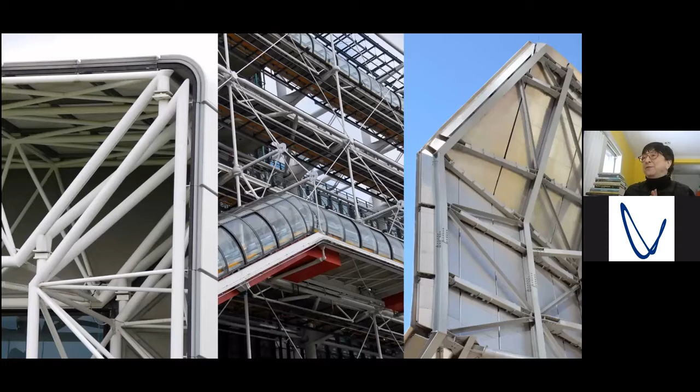And in fact, I spend most of my time these days, when I do attend conferences, attending engineering conferences and talking to engineers, because I find the field incredibly interesting. And I think the merging of engineering and architecture, as you can see in these sort of high profile projects that really started to shape my interest in architecture, the Sainsbury Centre, the Pompidou Centre, and Frank Gehry's Pritzker Pavilion, were very formative in my thinking about steel at a time in architectural design when nobody else seemed to be particularly interested in it.

High tech, not much. Deconstruction, yes.

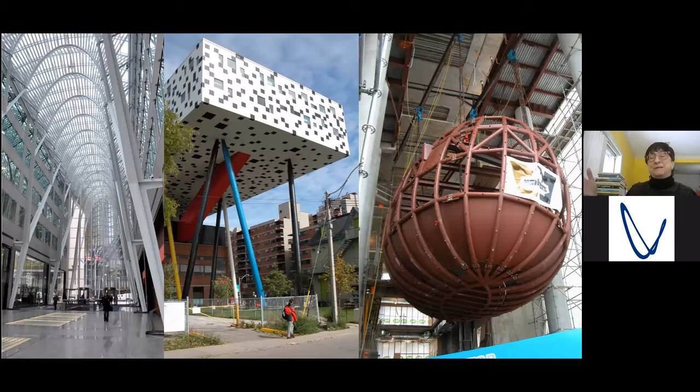Anecdotally, Frank Gehry, when I was a student, would come to the University of Waterloo because he's Canadian from Toronto, and we used to have Thursday night hockey at midnight. Frank actually played with the students back in the day. As I went through my teaching, I was somewhat distanced from real construction, just by the nature of the beast.

Then we ended up in Toronto with some really high profile projects. We had Calatrava's BCE Place, which you can see on the left, which I didn't have the chance of seeing under construction—it miraculously appeared because I don't live downtown. Then there's Will Alsop's OCAD building in the center, and Norman Foster's Leslie Dan School of Pharmacy on the right.

As you can see in the image on the right, I was on the construction site for that one. Being on the construction site and understanding the reality of putting things together gave me an entirely new perspective on architecture, construction, steel, and the way things work.

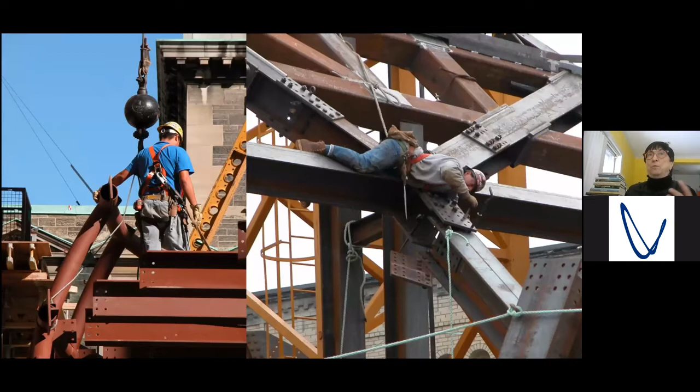So I took great joy in hanging out on construction sites, watching the ironworkers and understanding how they put things together and how they solve problems, because both the curved steel and the lifting of the pods, which we can see on the left on Leslie Dan, and the diagrid structure on the Royal Ontario Museum addition by Daniel Libeskind on the right, were really difficult and challenging projects.

I was so impressed by the quality of the ironworkers who—coming from an architecture background myself and understanding difficulties in construction—these gentlemen never lost their cool when putting things together, even if there were multiple tries at getting something to fit. That really, really resonated with me.

So the other aspect of the me part of things is me with my camera. What I began to bring to my research, this new life of research into how things get built, was photography—the details, trying to get up close, trying to go in with my zoom lens if I wasn't actually allowed access to the site, and trying to see how things went together.

That was something I could bring both to my required research as a professor—it is true, you publish or perish—as well as trying to bring interest for my students with anecdotes and images and information that they were not going to find in their textbook.

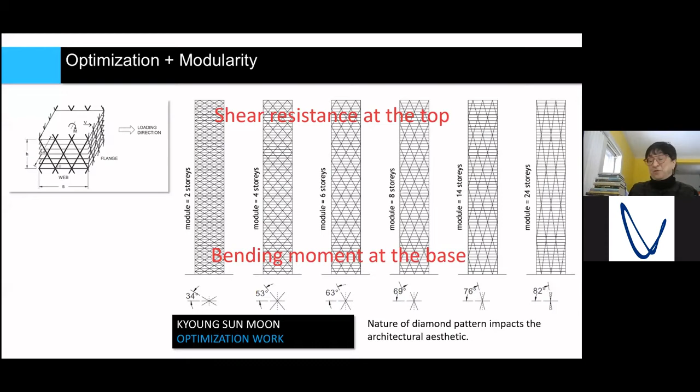There didn't seem to be anything larger—there was not a book on the topic. So I decided to make that the topic of my research. I went online and investigated everything that the Council on Tall Buildings and Urban Habitat had to offer on structural systems, and I came up with this suite of projects, looked at them, and said, well, this was quite attainable.

I could look at every single one of these buildings because this was it in terms of constructed or visionary diagrid structures. The ones I couldn't visit were the Shukhov Towers, and lucky for me, my colleague Elizabeth English had done her PhD thesis on that, so I had lots of information there. The Lotte Super Tower proposed by SOM wasn't built, but I had good contact with Bill Baker for information. I also had people at Farrell Partnership who could give me information on the first version of the Zhongguo Zun Tower. Tornado Tower and Doha Tower I was not able to visit because I had no access to Qatar.

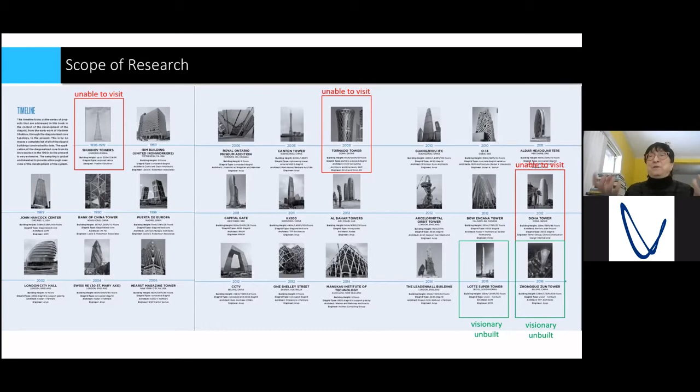So I started to examine these buildings, take them apart, look at their details, and try to come up with a methodology. From the Shukhov Tower, which was a hollow support system for water towers with no floors, to Swiss Re, which would be the first contemporary diagrid tower, where Foster actually referenced back to the Shukhov towers as a precedent, which one can see pretty clearly in the example.

When I was actually doing work over in the UK, which was sadly my last visit there in 2013, which makes me sad—I so enjoy visiting the UK—the Cheese Grater was under construction. I also had a colleague I'd met through conferences who was working at Arup.

The other thing I noticed looking at all the buildings was that two-thirds of them had Arup on the team. So I thought, if I'm trying to do in-depth research, I need to contact Arup. They were nice enough to allow me to sit in their offices for one week in February during my reading week, and go through all their files, papers, and photographs to help me with my work.

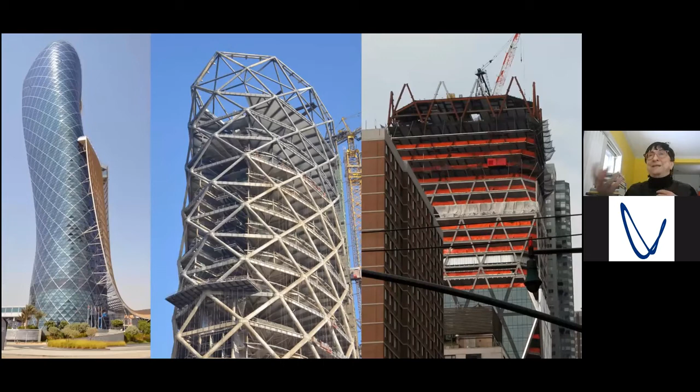Adding to that, we've got the Capital Gate Tower on the left, which was the furthest backward leaning one. There was one I ended up getting a site tour for actually after the book was published, the polydiagrid, the Diamond Lantern in Beijing, which I got a site tour of. And I happened to be in New York on other business when the Hearst Tower was going up.

So the idea to me is that you really have to experience things in person. There's only so much you can get from reading the information of others. There is just nothing that replaces a good old-fashioned site visit.

When I went through all the information, I came up with a methodology so that we looked at modules and modularity, node and member design. The cores on every single one of these buildings were different. What was revealed to me from the structural engineering perspective was that a true diagrid doesn't need a core—that all of the gravity and lateral loads should be able to be handled by that perimeter diagrid, which has no vertical columns. So I started to look at varying examples of cores: facade, glazing, expression, interior and exterior diagrids, and then technology, wind, and seismic issues.

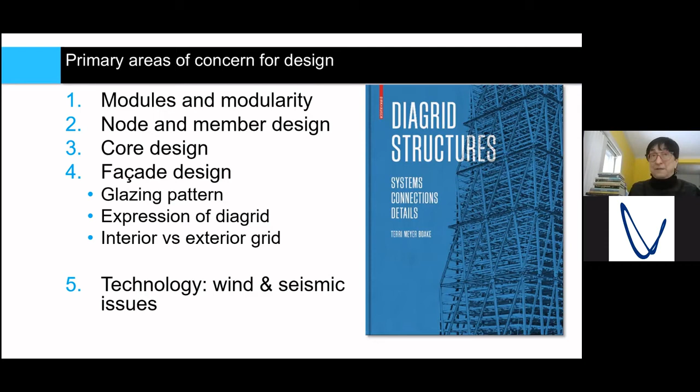So that was the essence of the text. But a lot of it drilled down to this first push by Kyoung Sun Moon in terms of optimization.

When I was looking at the Lotte Super Tower proposed by SOM, they had gone through a huge amount of research in terms of actual optimization of super tall towers. This was to be 555 meters tall, and they used parametric design to take it from very steep columns at the base, which were more useful in resisting moment and taking the gravity loads down, to quite sloped columns at the top with a round pattern.

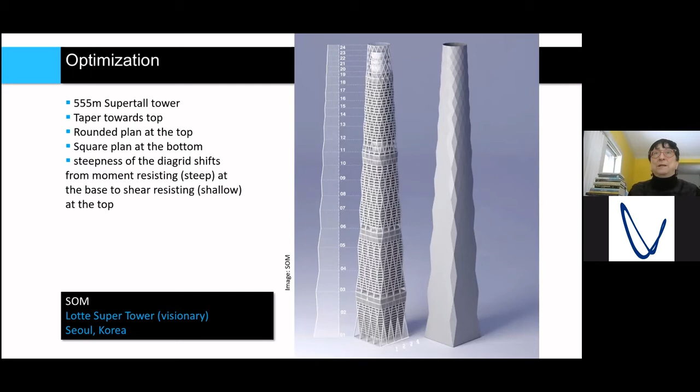The faceting on the building was also used in the wind design to fool the wind, to trick the wind, and to deal with vortex shedding. This is a little bit of the charts they gave me on their optimization study in terms of the forces and to come up with the angles.

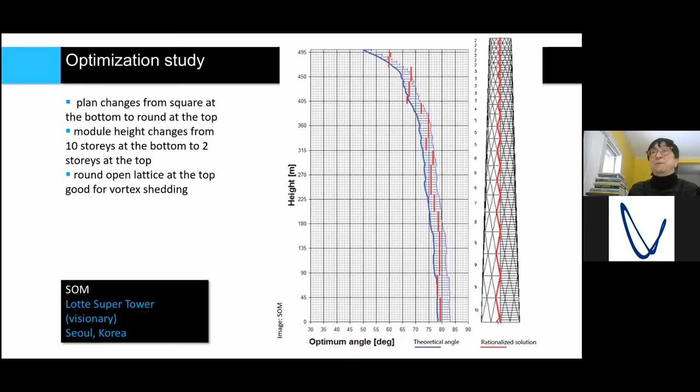But in the end, it looked to me that for the most part, it wasn't engineering at all that was pushing these projects—it was architectural design, and the slopes on very few of them had anything to do with optimization. They had to do with the shape of the building and the look of the building. From that research, I started to focus more on the node itself, because to me, and again with spatial structures, this is the big aha moment with diagrids.

We do not see many diagrid buildings still being constructed, because in spite of the fact that they can theoretically save on the weight of the steel, which should save some cost, the engineering and the construction and the fabrication is more than an orthogonally framed building.

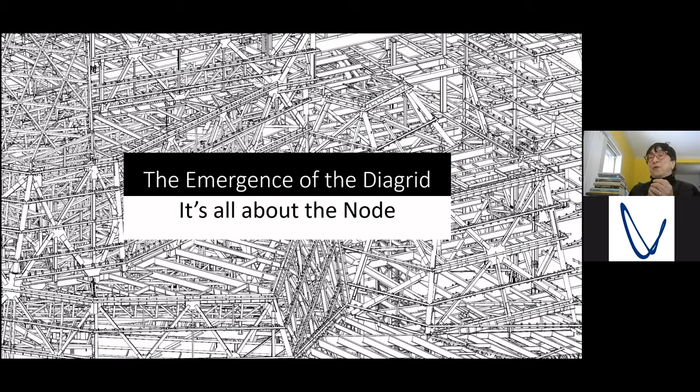But this idea of nodes as being a way to receive and transfer loads from various angles was a good takeaway for other more complex projects. If we look at the basic definition of a node - a point at which lines or pathways intersect or branch, a central or connecting point - this to me is the connection between lightweight systems and diagrid systems and heavier construction that is now looking at nodes as being really efficient ways to transfer forces.

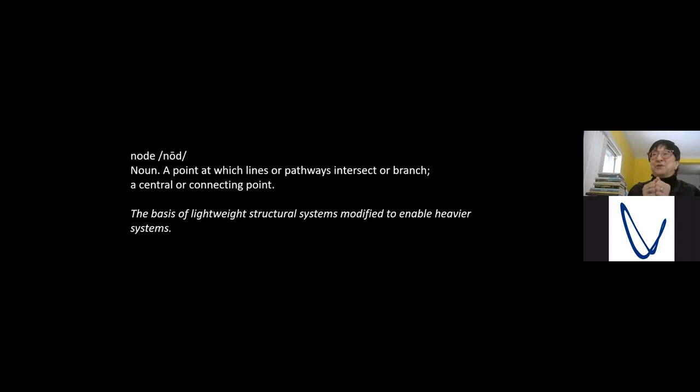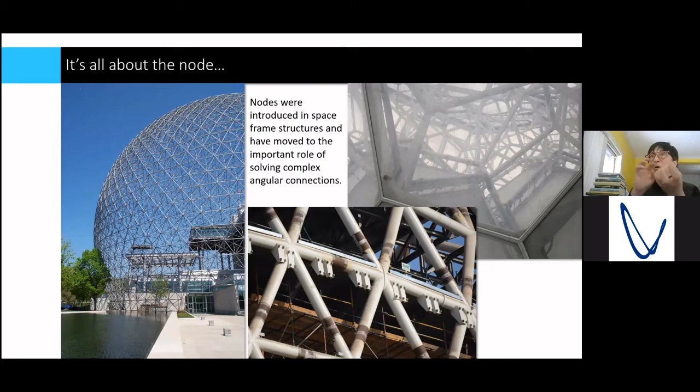If we look at node construction, we've got the Expo 67 in Montreal dome by Buckminster Fuller, we've got the Water Cube on the top right, and we have the Museum of the Future in Dubai. These nodal constructions are all designed to solve strange angular connections.

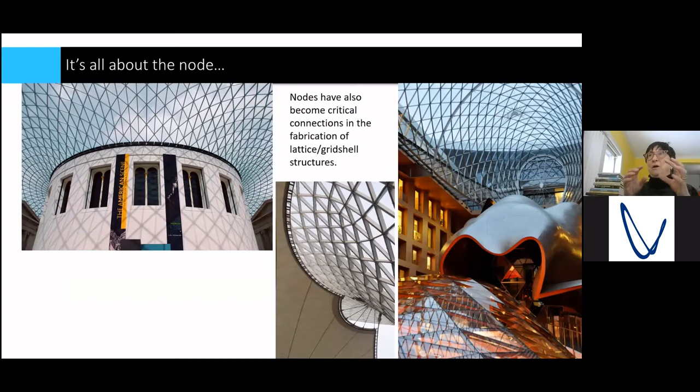And so we go then to more grid shell structures, which I think you've seen some of in previous presentations. We've got the British Museum, we've got the Gehry structure in Berlin on the right, and we've got the Shanghai Expo in the center. All of these are heavily reliant on very specialized nodal constructions to transfer loads.

And so I wanted to spend this little bit of talk just talking about node design criteria, because I think it's one of the newest areas in terms of structural design.

And so with respect to diagrid structures: was it a concealed or an exposed project? What was the shape of the incoming members? Are we site bolting or welding? That turns out to be very geographical in terms of safety issues. Are the members independent or integrated with the node? Shop fabrication was important - how many incoming members and the weight of the node pertaining to lifting when it comes to the crane size.

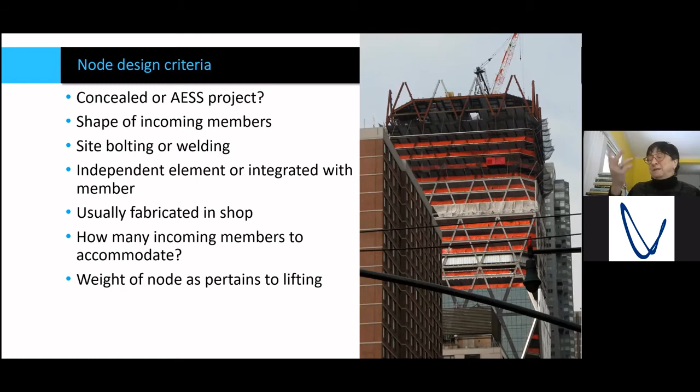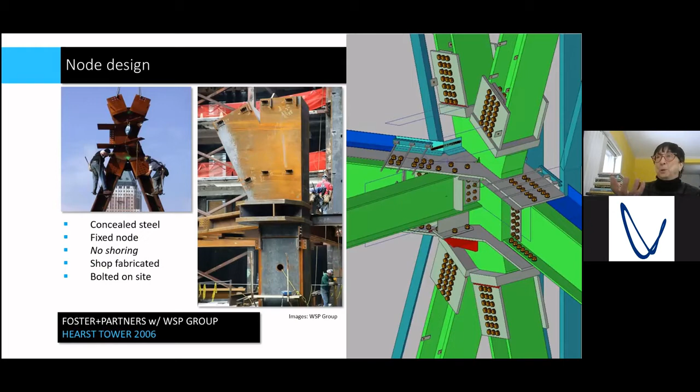And so this is the node design for the Hearst Tower. You can see from the central photograph how large the base connections were. But this is the point at which X-Steel transforms into Tekla Structures and really begins to allow and facilitate more of this to go on in terms of design.

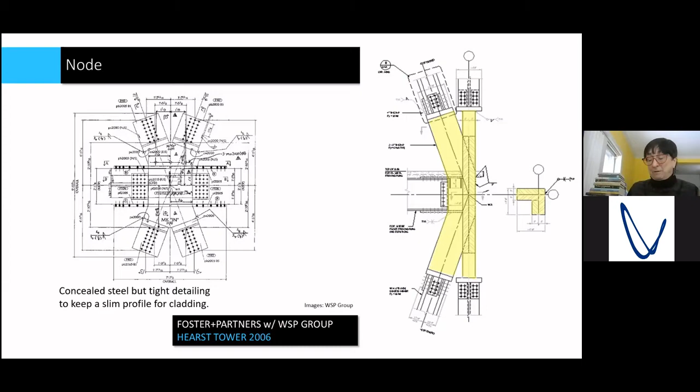But nonetheless, WSP shared with me some of these other diagrams of their nodal explorations, and you can see that simultaneously they were working through a lot of these connection details the old-fashioned way and also with hand drawing. Not to mention, I was so surprised to see them working through with balsa wood or basswood structures just to try to understand the three-dimensionality.

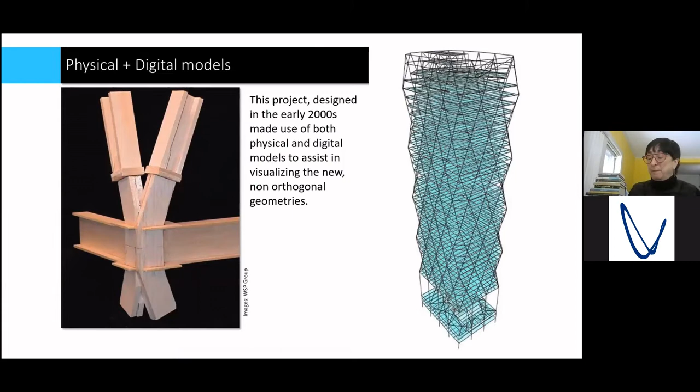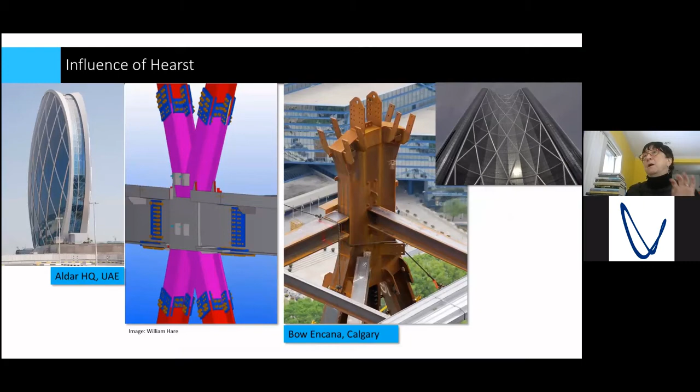Because I think with all kinds of spatial structures, it's the 3D geometries and the visualization that's really challenging. And so the node at Hearst had quite a bit of influence on Aldar Headquarters in the UAE, and on the Bow Encana in Calgary in terms of the connection methods.

If we look at the node design for Swiss Re, we can see something that is much more sleek, and even the way that the load paths are designed to go through, one might expect it to look nice exposed, but in fact it was designed to be sleek so that the enclosure system could be extremely tight. But you can see the clean lines and the geometry through the node itself.

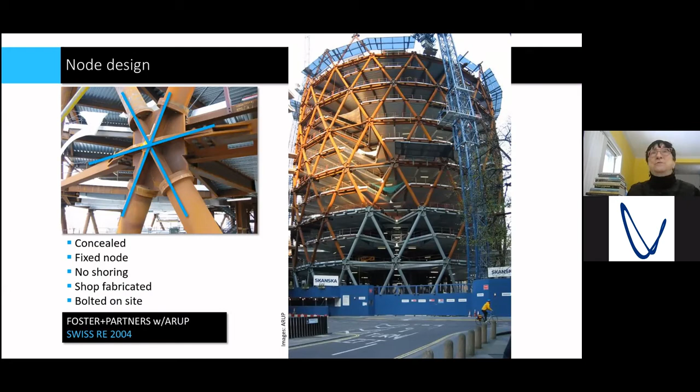And so that also held true for the node design for Capital Gate in the UAE. These are images by Jeff Schofield, who was the design architect for the project.

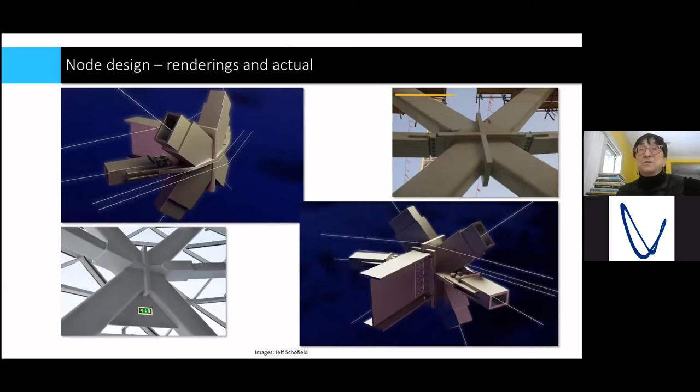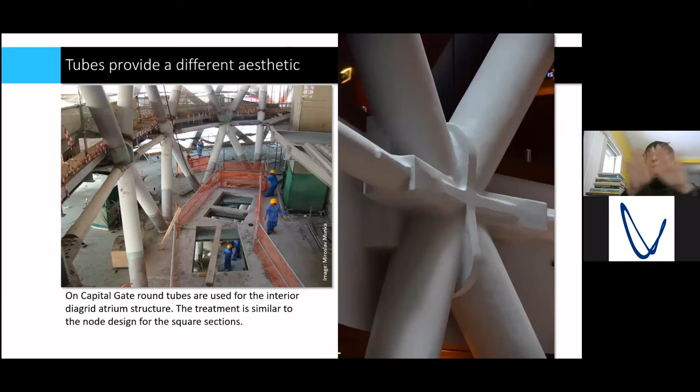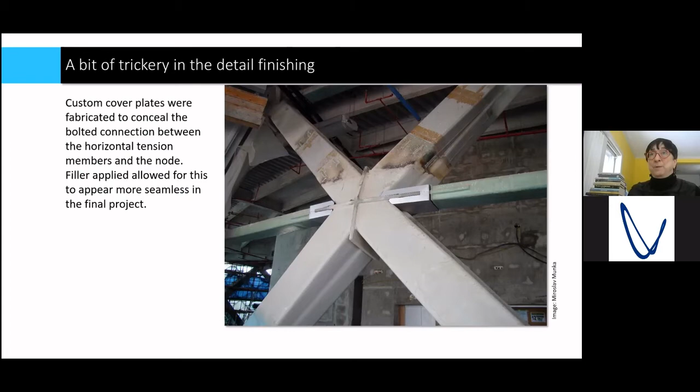And these are some of the interior connections whereby the member shape was changed, but the idea of having the plates running through the center as a way to accommodate these varying geometries was the similarity between the exterior and the interior node design. And a bit of trickery in the finish detailing to cover up the bolted connections - these ended up being coated with an intumescent coating, which is quite thick because they were exposed and therefore needed to have a certain fire resistance rating.

The Leadenhall Building - as I said, I was in London when this one was going together. It was also really interesting to see fine variations in terms of plate thicknesses for all of these custom designed members.

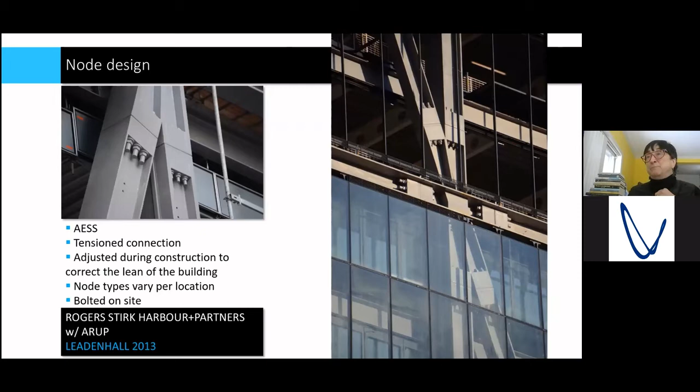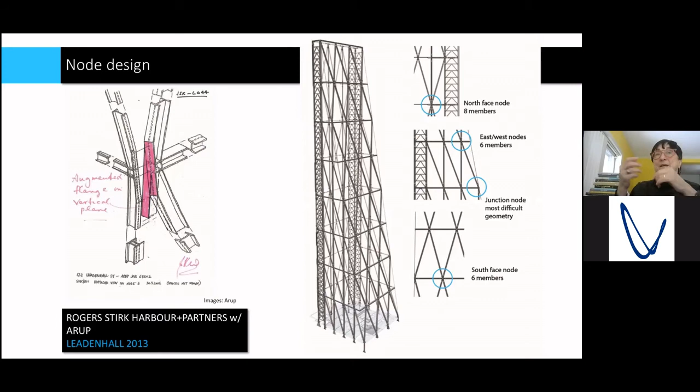There's a huge preference in North America and Europe for site bolting for reasons of safety. The same would hold true for Australia. But these were shared with me by the design engineer for the project, showing how they were beginning to manipulate the interior of the connecting detail, doubling up the plates in some cases, and trying to accommodate varying geometries and varying numbers of members.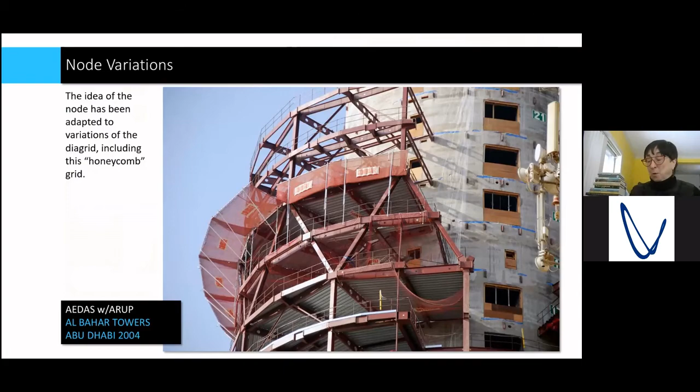And so we saw all sorts of variations of this sort of geometry of the node on different kinds of projects. This is the Al-Bahar Towers, which look like a pair of corn cobs, in Abu Dhabi. There you can see them, and those are the nodes on the right. You can see the predominance of bolting used to do this connection detail.

Steel is not a very common construction material. In the Middle East, you see a lot more concrete. And so the idea of using bolting makes it easier to use the workers that are available more easily. Welding requires a lot more site expertise.

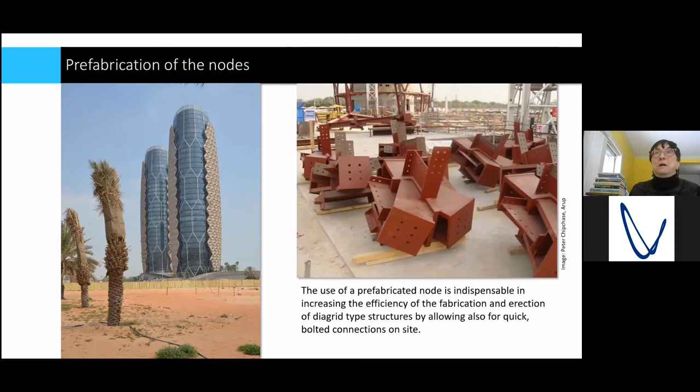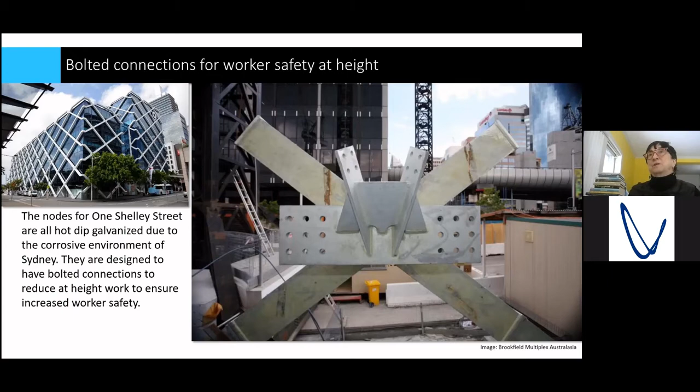As I said, Australia also uses bolted connections, and Brookfield Multiplex Australasia actually forbids welding at height. So that's something that's really important to know when you're doing a project in different parts of the world - what kind of method of construction is deemed to be acceptable.

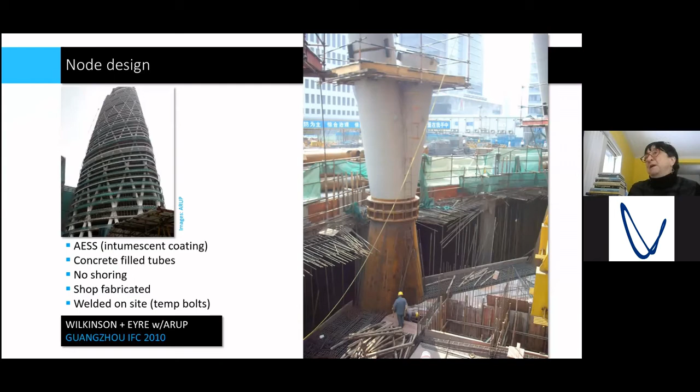In China, and this is the Guangzhou IFC designed by Wilkinson and Eyre, everything was welded. These are concrete filled tubes, and this kind of construction is absolutely normal in China. You would be hard pressed to construct something like this in North America or Europe because of the construction methodology.

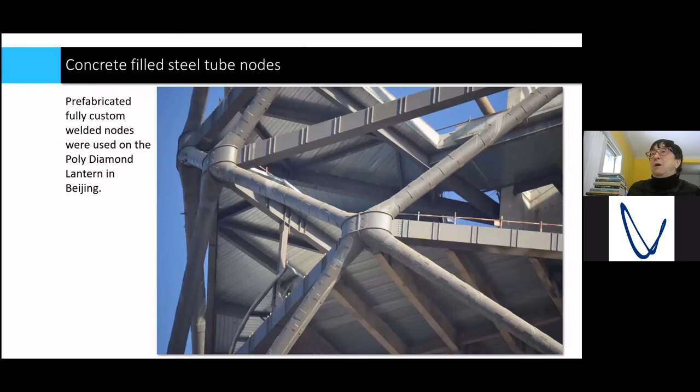So this is again the poly diamond lantern in Beijing, using concrete filled steel tubes and all welded construction. And here you can see the design of the node and some of the site connections that would have been done at height.

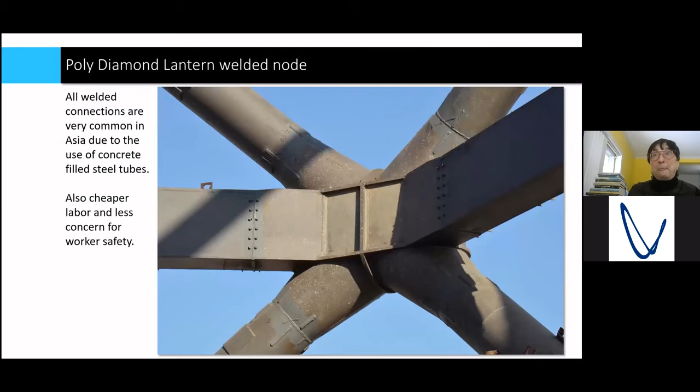The Canton Tower was interesting in terms of it also being a concrete filled steel tube structure, all welded, but here the node ends up being incorporated into the member itself as opposed to being a unique item on its own.

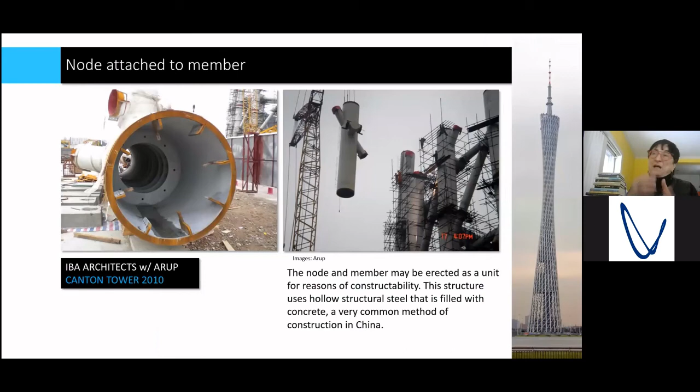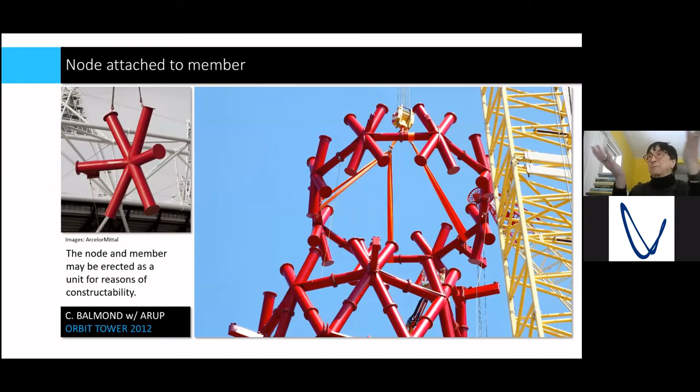Anyone who went to the London Olympics would be familiar with this lovely structure by Cecil Balmond, done with Arup, whereby here again we've got the plate used to create the juncture between the members, but in this case the node and the members are one, and there are simply bolted plate connections between.

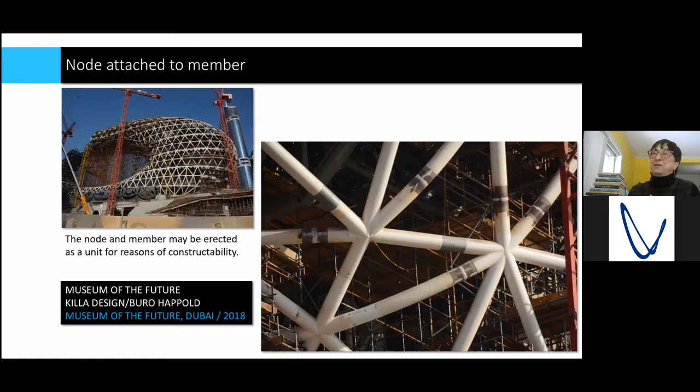This is the Museum of the Future in Dubai, and again we're looking at a tubular structure, but they wanted it to be very tightly clad. So this, although it looks like it could be exposed, will in fact be completely concealed. They used all welded connections here in order to keep everything super tight for the cladding.

As I alluded to at the beginning when we looked at the Hearst Tower, the evolution of structural design and fabrication software has been critical to allowing so much to happen in terms of complex structures, as well as diagrid structures. So this is a Tekla image of the ROM Crystal in Toronto by Daniel Libeskind.

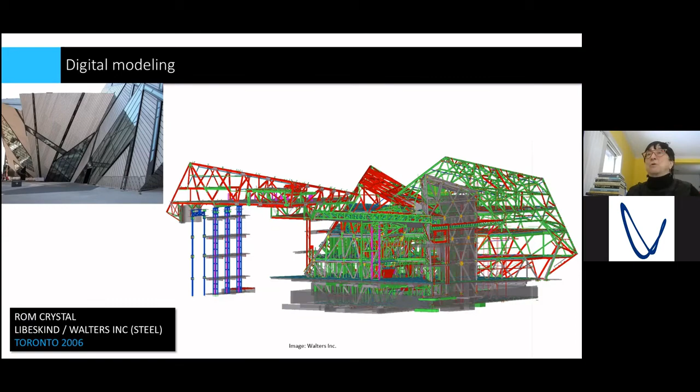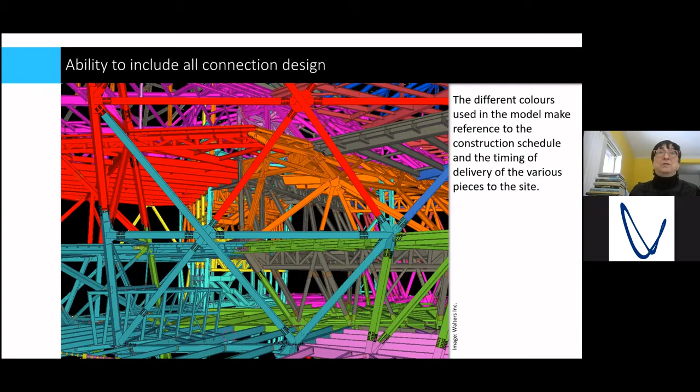And these kinds of drawings allow the fabricators to go into each and every connection detail and design the bolts, design the welds, do the shop drawings. And so we end up with a digital model that precisely matches the constructed piece.

And in something this complicated, that's so necessary because there's no room for slippage. There's no room for error. Otherwise, it just won't fit.

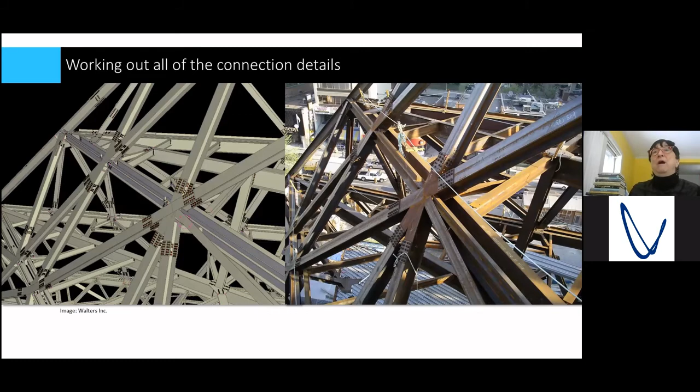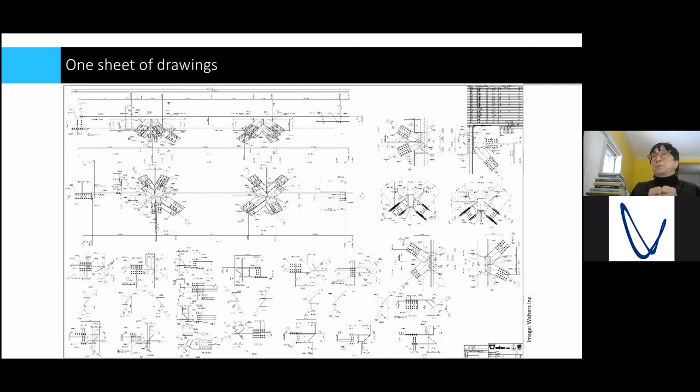And so this is a single sheet of drawings for one element on that project. So you imagine that the software has improved to the point where for one element, one sheet of drawings - we could never have done this before.

This is another element from that project where they actually became quite affectionate and nicknamed it the owl in the fabrication shop, because that's what it looked like.

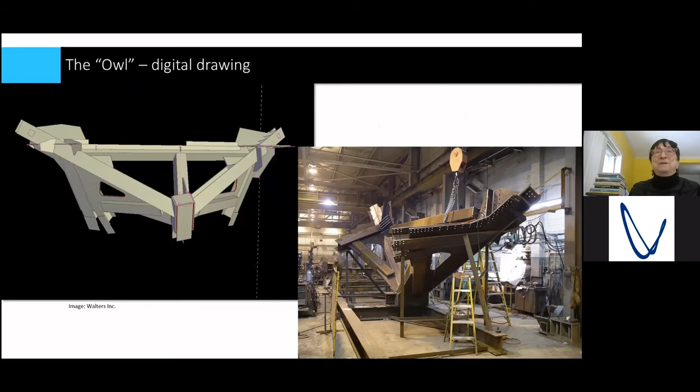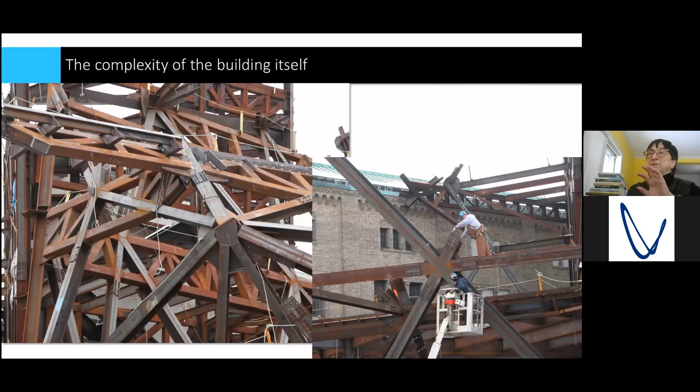And again, looking at projects from the point of view of constructability and the iron workers and problem solving, I think it's paramount for anybody involved in architecture and engineering to understand how to put things together. We have to understand that our designs are impacted by and impact the people who construct them.

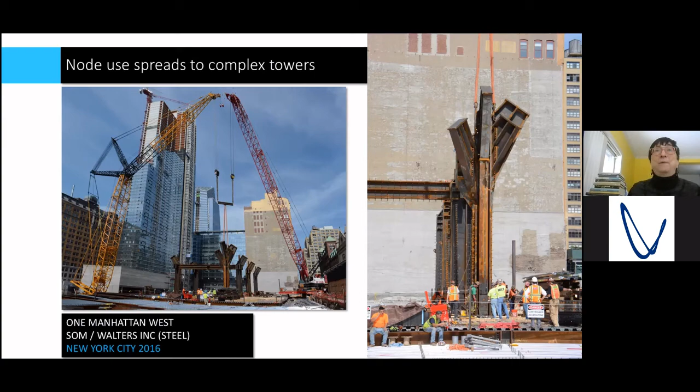And so, to me, it's all about the node that comes out of the whole study of diagrid towers, because in and of themselves, there's still not that many of them around. And so we have a new technology that has been translated to other kinds of building construction.

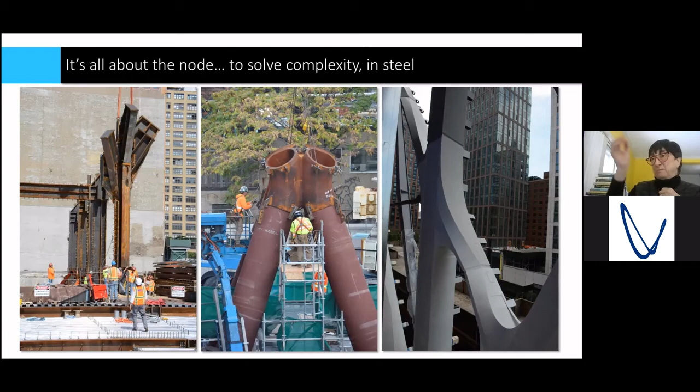So there's a cast node in the center of the central diagram, which is a project in downtown Toronto. And then we have a fabricated node out of plate steel, all rolled, bent, welded, on the right, which is at the shed in New York City. You can see here construction photographs of the shed, as well as the finished photos.

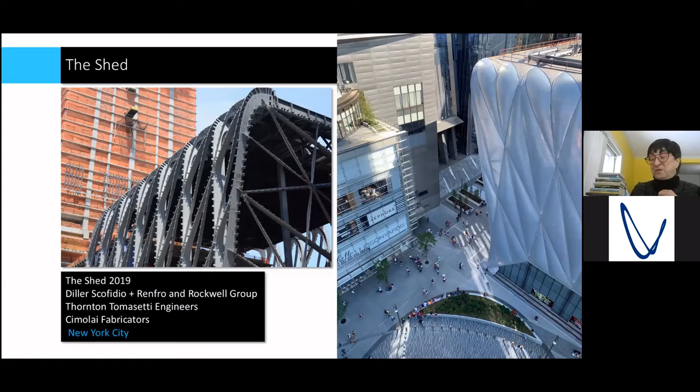I think one of the bigger takeaways is teamwork. I wanted to share with you, as somebody who is an architect with an inner engineer who wrote a book on diagrid structures, who had to ask engineers and fabricators for information and images to buoy up my understanding and knowledge. It was such a treat to get this from Ahmad Rahimian, director of building structures at WSP, who worked on the Hearst Tower, and to have him thank me for sending a copy of the book. He said it would have been so helpful when they were designing the Hearst Tower a decade and a half ago. That, to me, made writing the book completely worthwhile.

The diagrid structures I talked about today are from the book I just completed during my COVID lockdown, Complex Steel Structures: Non-Orthogonal Geometries in Building with Steel. There's a lot more information in that book on complexity and on node design in general.

And with that, I will hand the interview back to Mark.